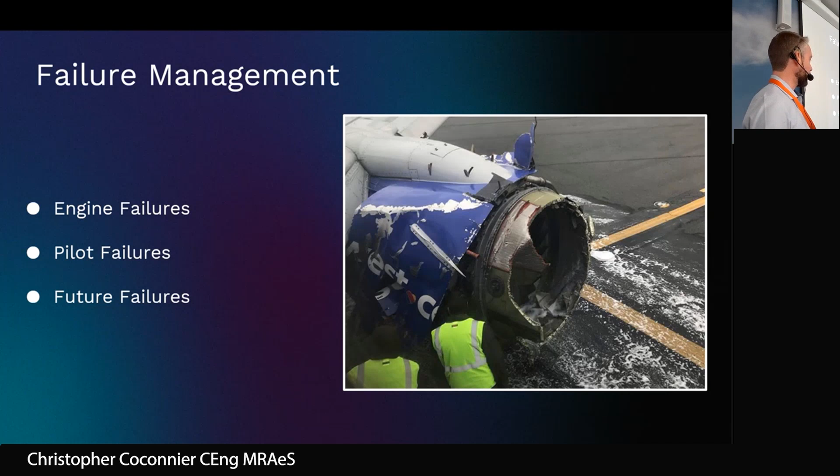So we're going to talk about failure, and of course, a lot of you here joining this presentation are Rolls-Royce engineers, so we're going to focus on engine failures. As Stuart mentioned, I wanted to add a part of this presentation talking about the human factors. It's a large part of aviation safety, and I wanted to bring it further so that we look at what the future brings in terms of aviation safety. There's a lot of discussion nowadays about what's coming next with automation, single pilot flight deck, and potentially autonomous aircraft.

So let's jump in first, talking about engine failures, and let's talk about the training involved. So EFATO is the name given for engine failure at takeoff. Why is this important? Originally, jet engines were, at the very beginning, quite unreliable, especially during takeoff phase when thrust would be engaged immediately, and failures used to happen statistically at higher rates during that critical phase of flight.

So engine failure at takeoff was then the most practiced engine failure recovery in pilot training. And it starts from the commercial pilot's license. So basically, when I did mine, this is the point where, as a pilot, it's your first time in a twin-engine aircraft, a twin propeller engine aircraft, and you spend most of your time with the instructor actually flying on only one engine. And why is that?

Basically, the instructor spends most of the flights shutting down one or the other engine to see how you react. And basically, the immediate reaction you're supposed to have is to compensate the yaw that you're getting from losing the engine and immediately step on the rudder pedal to compensate that yaw and apply opposite rudder. That has to be ingrained from the get-go when we're flying twin engine aircraft. That's why it's so important.

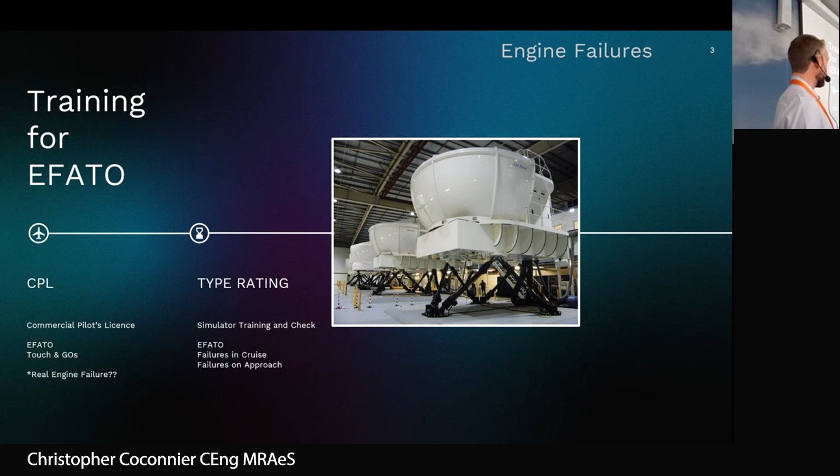We also look at failures in cruise, and failures on approach, and practice these in the simulator over and over until we pass the type rating check. The engine failure response is assessed during that check to get the type rating.

Further to that, then we're on the line, flying on the line, we have this recurrent training. It's twice a year. As an airline pilot, we get thrown back into the simulator, generally a 5-hour session, and we get thrown at us all manners of failures, including, of course, engine failure, which is integral to those checks.

We look at engine failure at takeoff, again, failures in cruise, failures on approach, and sometimes we exercise more tricky things like dual engine failure and other survival exercises where we'll have a combined type of failure. That's twice a year, and once a year that is also assessed so that we get to revalidate our license. Our license is only valid 1 year, and we have to get reassessed every year to keep our license.

Then, of course, there's flying every day with passengers, and engine failure again comes up. It comes up as we're setting up the aircraft, planning our flights in the flight deck, and we have the moments of briefing with the captain and the first officer, where we discuss rejected takeoff and engine failure at takeoff.

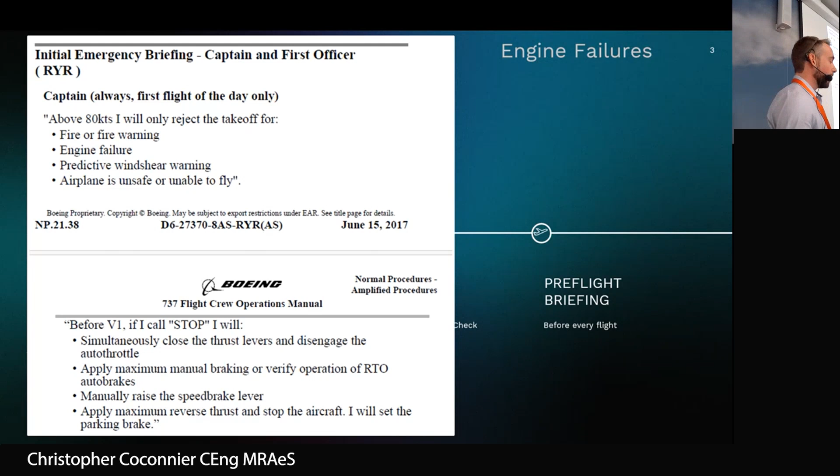That's also the reason you get, as a passenger, the cabin crew announcement safety demonstration, so that as a passenger, you get preloaded in your brain what you're supposed to do. That's why we even say to regular passengers, please listen, because it's important so that your brain is preloaded with the actions you'll have to take.

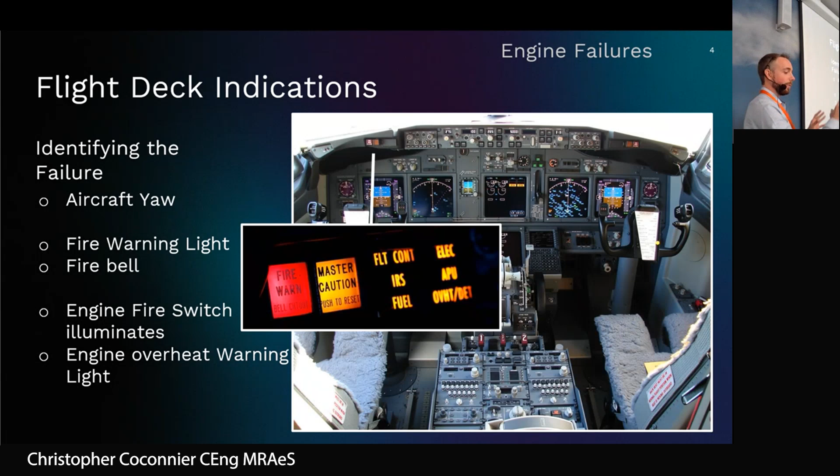On more modern aircraft designs, such as the Airbus and later 737, all failures are centralized on a central computer, which tells the pilot the failure and the steps to solve it. On the 737, we just get lights - in red, the fire warning and master caution light. In case of fire, the fire warning comes on, associated with a fire bell, and the response is clear. Master caution relates to other lights on the side - could be electrics, APU, fuel - giving pilots a general idea where to look on the overhead panel, which systems to check for lights. Each system on the 737 has an associated light bulb. When something goes wrong, that light bulb comes on and tells you that system has failed. So very unlike modern centralized computer designs, each system has an associated light telling us what has broken.

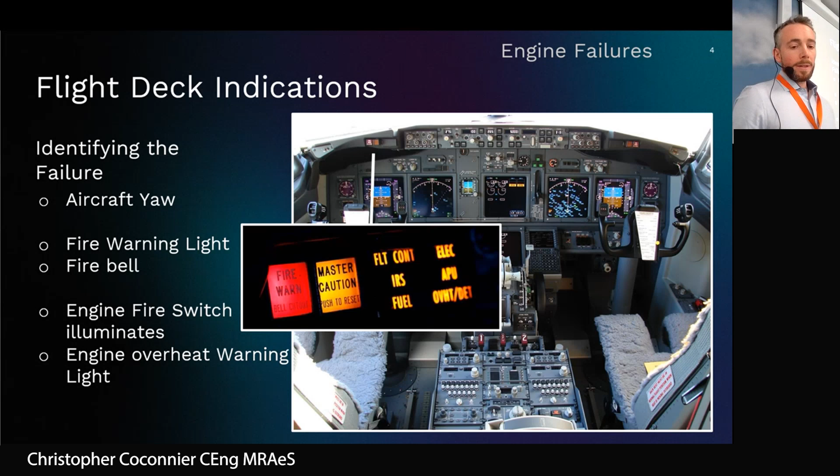Let's look at the pedestal. We have the thrust levers here, and the engine start levers below that, which ignite and input fuel into the combustor. And we have the fire switches - important in case the fire bell comes on, and our eyes immediately go down to check which engine is affected. Those switches - 1, APU, and 2 - relate to engine 1, the port engine, the APU, and number 2 engine, which is the starboard engine.

Those fire switches also have a light bulb, and they illuminate in case of fire, so we can't get it wrong - we select the one that's illuminated. We pull it, that shuts down the engine, and then we can rotate it, which sets off the extinguisher. On the 737, there are 2 extinguisher bottles, and for one engine you can use one or both extinguishers if needed.

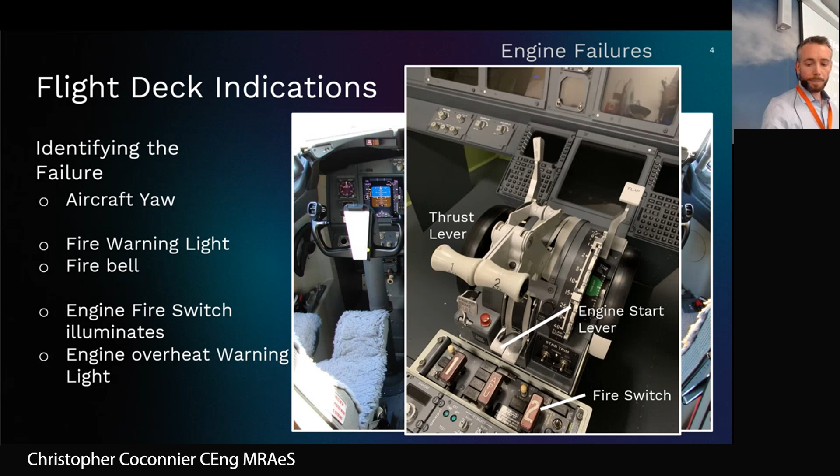So let's keep looking at flight deck indications. Fires are generally the easier ones to pick up. There are other failures, though, which are more common.

Question: Do we actually have feedback if the fire is extinguished? Yes - the lights will extinguish, and first we'll get feedback that the extinguisher bottle is discharged, and then the light will also extinguish for either overheat or the fire.

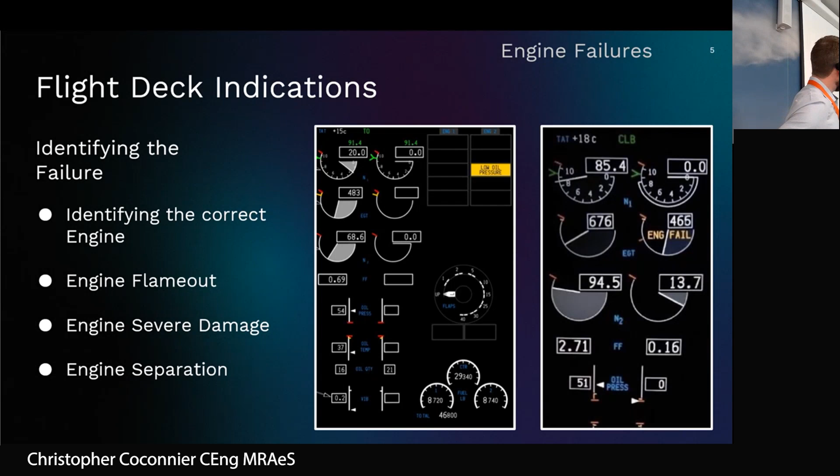So, yeah, I'm going to carry on talking about flight deck indications and this case study, which is quite interesting. This was British Midland Airways flight 092 in the 1980s, 1989, a brand new aircraft, a 737-400. It was the re-engined 737 with the brand new CFM 56 engines.

The aircraft was about 4 months old, and there was a fan blade flutter on the port engine that provoked an uncontained engine rotor failure on approach. The pilots misdiagnosed the failure and shut down the other engine. Now, there's a few reasons for that, and we'll look into it.

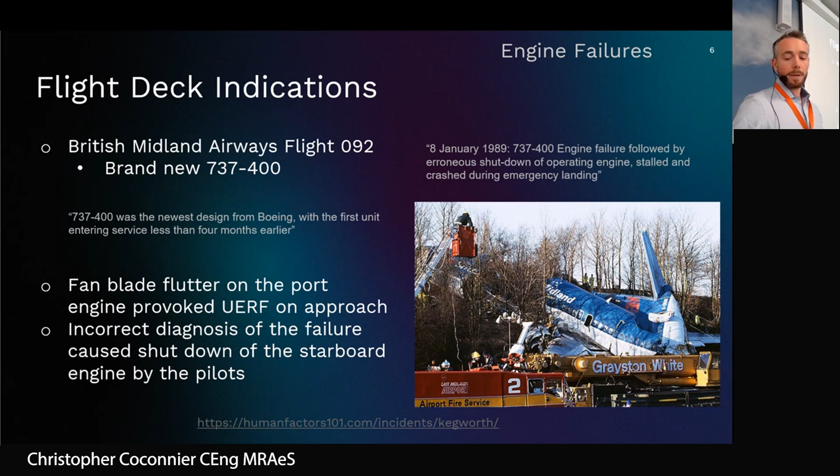One of the reasons was the updated engine indications panel, before the screen digital display I showed you earlier. Both pilots were very experienced on the 737, but not experienced on this new aircraft. This display was basically an update where they digitalized information. They used to be just gauges, with bright white needles you could quickly scan depending on the phase of flight to see everything was in the correct position. If something was going wrong, you'd see the needle fall. So these new displays were already a first source of confusion.

Now, there was something else. There was not only a new engine design, but also a new bleed air design. In that engine failure, they got smoke in the flight deck. As far as they knew, on the 737 until now, the bleed air into the flight deck came from the right engine. So when they had smoke in the flight deck, they immediately assumed the right engine had failed and shut it down. Except in this new design, the 737-400, the whole concept was changed for the bleed air, and it was the other way around—the bleed air came from the left engine. They hadn't received enough training or awareness from the company about this, so that knowledge was missing.

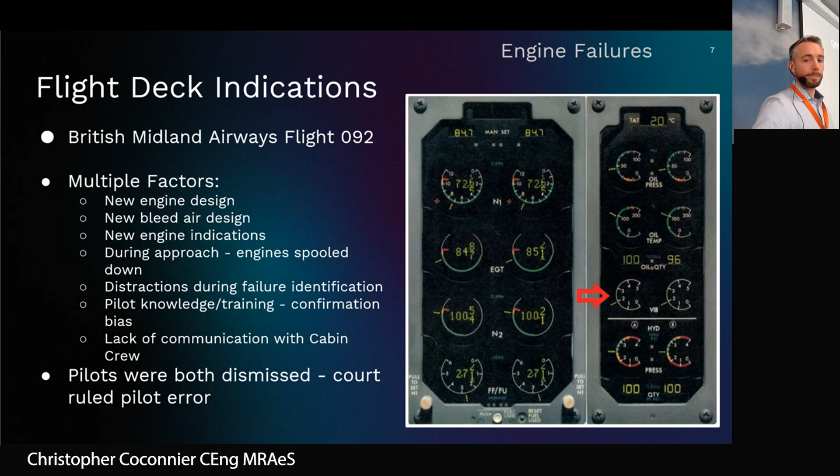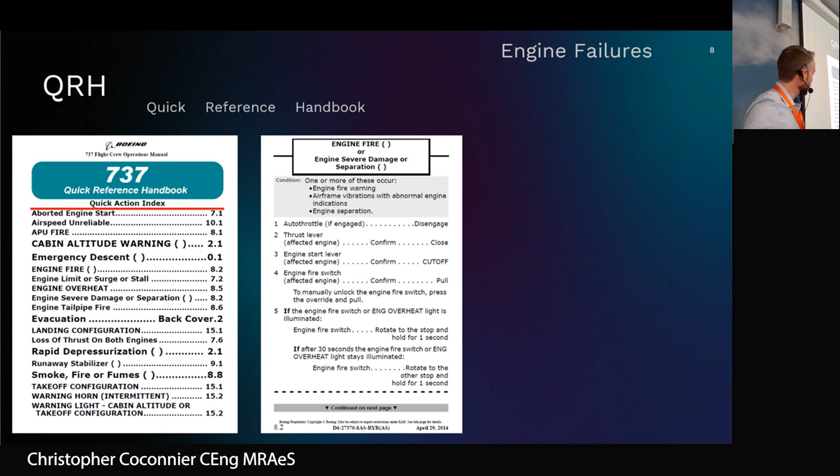So we'll come back now on the quick reference handbook, just to give a bit more detail. The QRH, as we call it, quick reference handbook, contains basically all the responses to any kind of system failure on the aircraft. That's the front cover here for you to see, and as you can see, a lot of the engine issues are on that front cover. Those are basically some of the main issues and the most immediate actions. There are many more checklists in the actual book.

Some of them you might notice are also written bigger, like the cabin altitude warning, or the evacuation, or the rapid depressurization. That's because Boeing estimated that in those conditions you'll have limited visibility. It's written bigger because, for example, in smoke, fire, fumes, or rapid depressurization, you suddenly get a lot of water vapor forming in the flight deck and in the cabin, so you want to be able to read that.

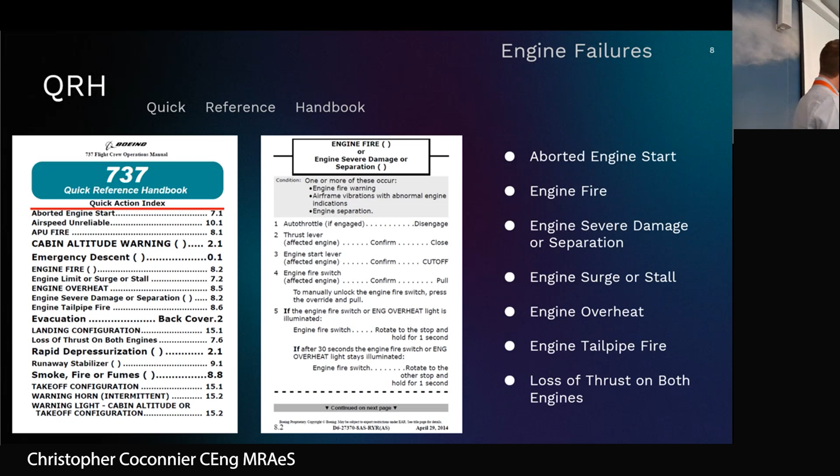So we've got here the engine fire, severe damage or separation checklist, same checklist, same response for both. And all those items, the first 5 items, are memory items. So those are items we're going to do as pilots from memory, and we're basically going to call out all those steps.

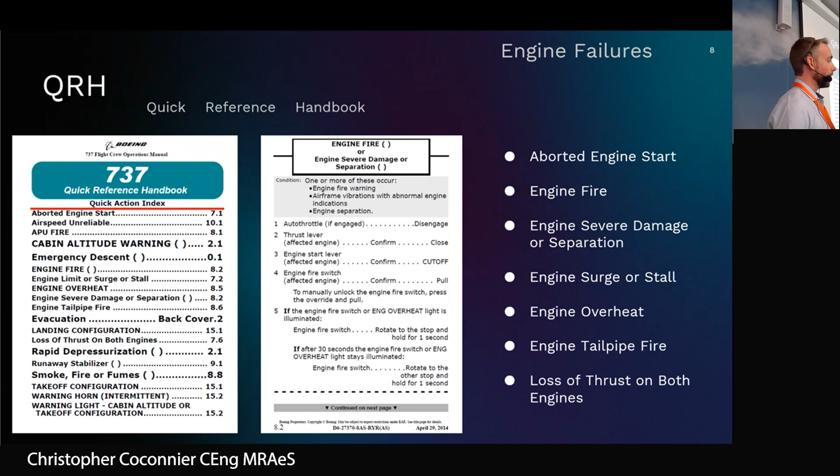Auto throttle if engaged, disengage, thrust lever engine number 1, confirm, close, engine start lever engine number 1, confirm, cut off, engine fire switch engine 1, confirm, pull. Then if the fire switch is illuminated, rotate stop, hold for 1 second, and that basically causes the extinguisher to activate.

So we have the list here of all the engine-related failures which have the checklist.

So we've got aborted engine start also in the QRH, which is a failure on the ground, in which case we abort the start. We've got engine fire, which we've mentioned, severe damage separation.

We've also got surge or stall, which has a slightly different response, which we have here. We have engine overheat, which is basically EGT going out of limits without actual fire, and engine tailpipe fire, which might occur on the ground, and then also the more unlikely case, loss of thrust on both engines.

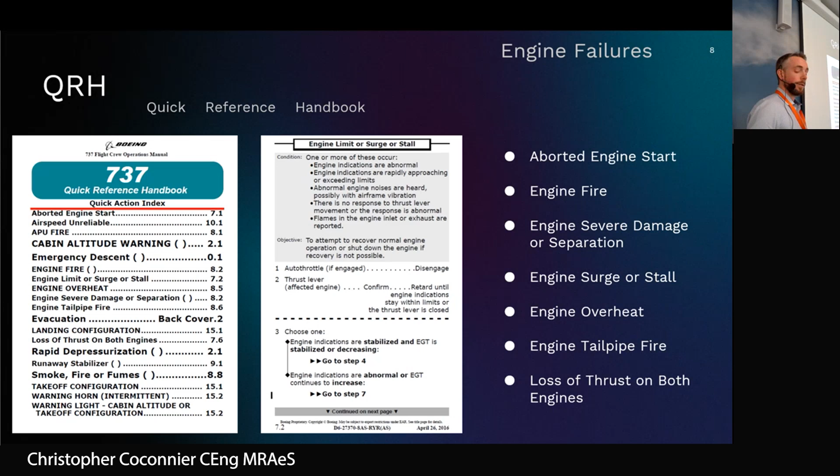And that, by the way, is the only time the checklist tells us by memory to attempt a relight, lost thrust on both engines. And in fact, we're going to later have a look at the relight.

And most of the time, the checklist basically prompts us if we need to relight. If the checklist doesn't prompt us to relight, we don't do it unless it's a double failure.

So now looking at engine failure at takeoff, I'll bring you through the whole sequence because the checklist is only a very small part of what we're doing.

It's generally statistically used to be the case that the worst case is when you'd have an engine failure at that point, you're going at high speed down the runway, you want to get off the runway, you want to avoid obstacles. So you want to be able to climb out. It's a critical phase of flight, and that's why we practice it.

So after that, we call positive rate. The pilot, in those situations, we always have one pilot flying and one pilot who's monitoring the instruments and doing the radios with air traffic control. During a normal day, we interchangeably swap those roles with the captain and the first officer, so one is always pilot flying, the other pilot monitoring.

So in this case, in my company, as pilot flying, we call positive rate, the captain will put the gear up. Of course, with the engine failure, I'll be looking outside, apply rudder to compensate, hold the rudder. Pilot monitoring will call air traffic control and call standby.

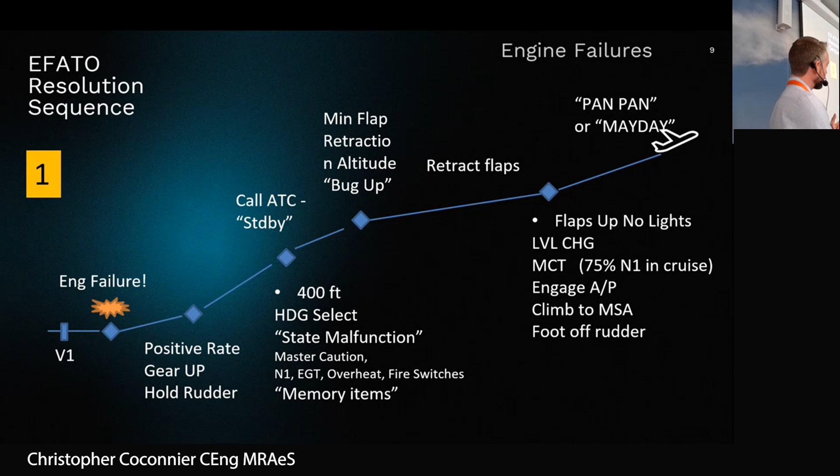So for comparison, I have a few colleagues who've flown the Airbus, and on the Airbus at 400 feet, they can just immediately call autopilot. That's it. During that whole phase, until 3,000 feet on a Boeing, we have to have our leg basically holding the rudder, and at that point you start getting a cramp.

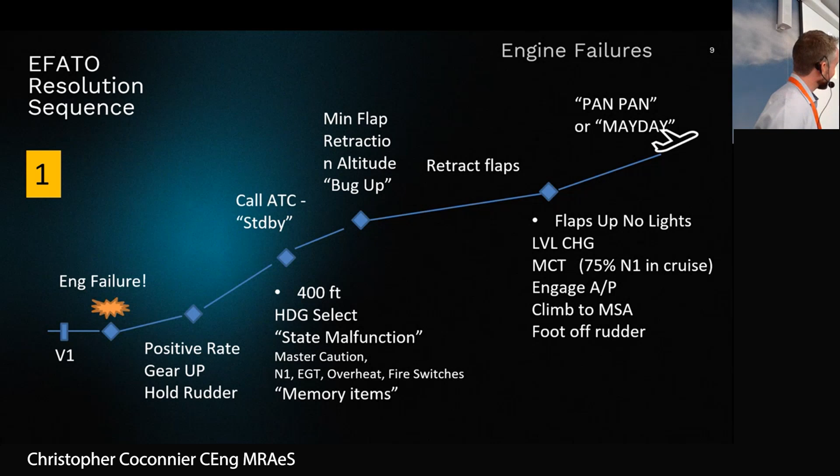So yeah, engage the autopilot. We climb to the minimum safe altitude, and at that point we can take the foot off the rudder.

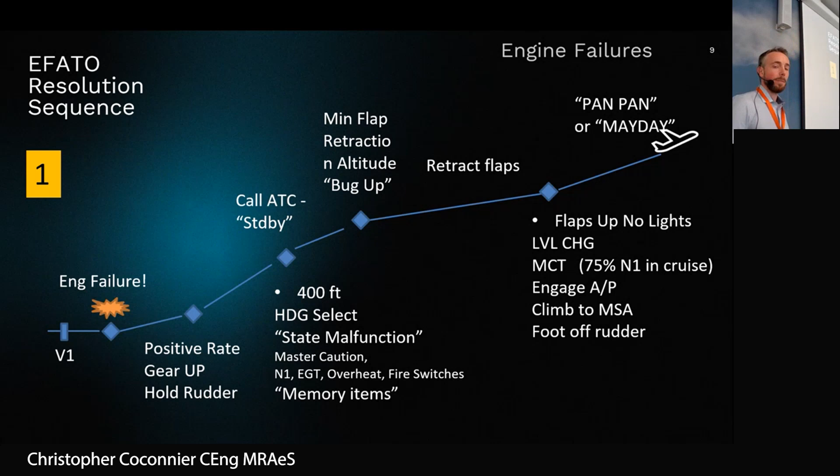At this point, the pilot monitoring can call ATC and call either a pan-pan call, and if it's more serious, in case of fire, you'd probably call a mayday call. So mayday, mayday, mayday, your call sign, and then the failure.

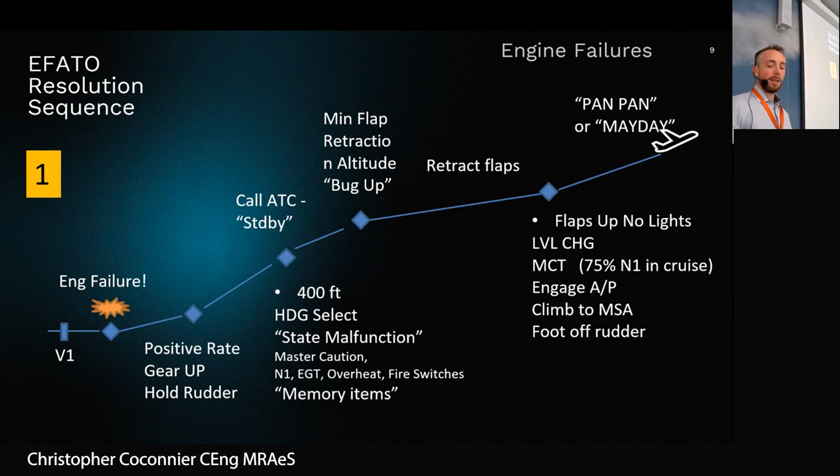That's not the end of it. So we call ATC, we request a hold, or we request vectors to stay in the vicinity of the airport we've just taken off from.

At that point, the aircraft is under control. We have time now to look into the quick reference handbook, so we open up the right page and we go through all the checks. We read them out loud and do all the actions that are required.

We come to a point when the checklist requires us to switch the APU on to get a backup power source. We switch it on. While that's happening, we get the weather from the departure airport to see if we can actually land there. Possibly we took off with fog, that sort of condition. We wouldn't be able to land in fog on one engine. We don't have category 3 landing capabilities on one engine because we don't have both autopilots in that situation.

Then select the autopilot opposite the failed engine, and at that point we can put the QRH on the glare shield and start planning to land at the nearest airport. At this point only, we do after takeoff checks, and then we discuss, captain and first officer, about what we're going to do.

Part of discussion is calling the cabin crew and asking for any useful information, anything they've seen out of the window, any noises they might have heard.

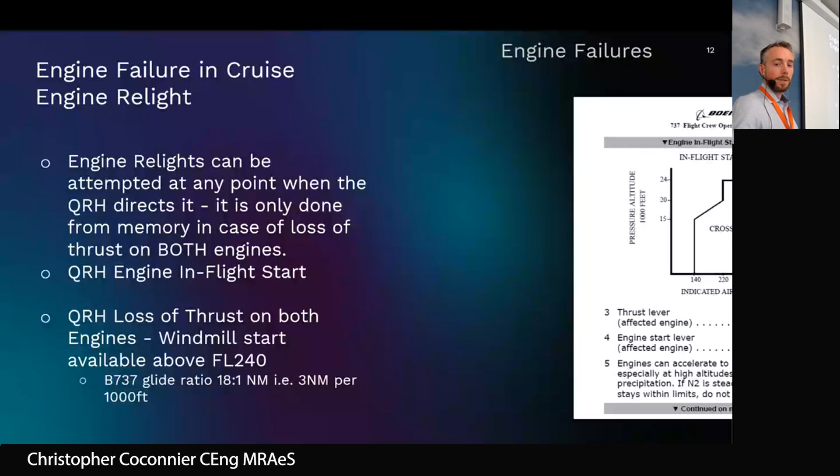Basically, a quick word now on engine failures in cruise and engine relights. This is more for the engineers here. Basically, how we determine we can relight.

The checklist tells us basically when we can relight, except in the case, as I said, of a double engine failure, where we just immediately try it on memory. It just involves shutting down the engine start lever and then opening it again.

In the case the checklist tells us to do it, let's say after takeoff we've got an engine flame out, we can attempt it, and you've got basically that flight envelope. So on the x-axis, you've got indicated airspeed, and on the y-axis, you've got the pressure altitude. Generally at low altitudes, you'll be going around 220, 250 knots.

So most of the time, you're in the area for the cross-bleed start. That means you're using the bleed air from the functioning engine to restart the failed engine. And if you're at higher altitudes, you can, as you descend, especially in the case of loss of both engines, reach much higher speeds. So above 300 knots generally, you can attempt a windmill start, just using the speed of the aircraft and the wind to attempt to restart.

That's it. And by the way, if we have a loss of thrust on both engines, what really interests us as pilots is knowing where we can land. One figure we generally have in mind is the glide ratio, and most airliners nowadays have very similar glide ratios, which is very good, I must say. It's about 3 nautical miles per 1,000 feet.

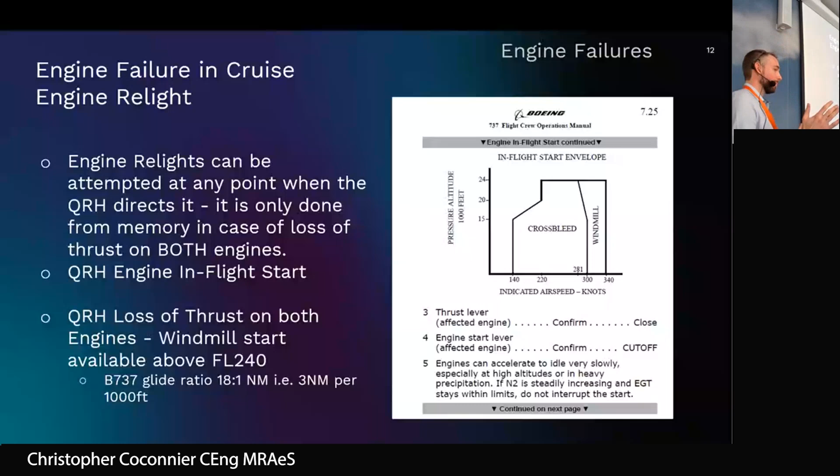So that's just an example of the loss of thrust on both engines checklist, and the memory items are the first 4 items of that checklist. Basically it's 2 attempts at relighting the engine.

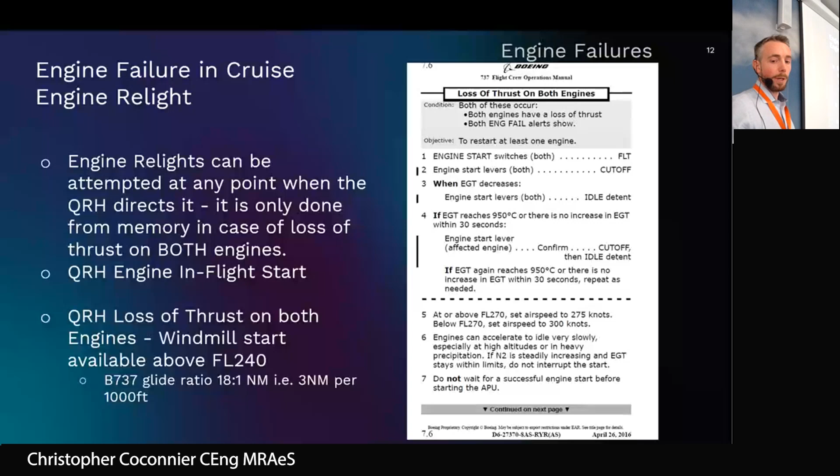And the whole checklist basically gives multiple attempts at relighting the engine. It also gives indications of the flight level and the speeds required, if you look at point number 5.

So we're now going to have a look at, yeah, please. Question: do you try to stay at altitude if you have those engines out, or do you want to dive down into the relight envelope?

Yeah, that's a good question, and I've discussed this with Manuele quite a bit, and we don't actually learn about that as pilots, about keeping an optimal glide slope.

We basically at that point, as the checklist points us towards, are getting the maximum speed possible so that we can attempt the windmill relight. That's it. But the optimum glide is not something we have in mind. We don't have the optimum rate of descent. We just have the idea that we can travel 3 miles per 1,000 feet, just for landing purposes.

So I'm going to show you now a video from our training department, which is basically a demonstration of the rejected takeoff, so you get an idea of what's happening in the flight deck and the pace of all the actions during an engine failure at takeoff. I'm going to start that here, and I'll let you watch this.

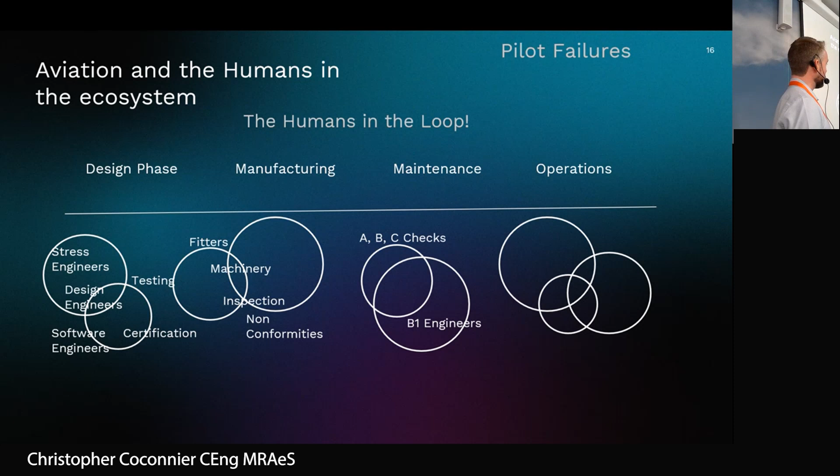Then we've got manufacturing. There it's quite usual: fitters, machinery, inspection, non-conformities. These things happen regularly. Further on towards operations, we get maintenance, A, B, and C checks. Not unusual in those conditions, they go stripping the aircraft, parts are missed, sometimes tools are left in the wing tanks. These things have happened. We then get our B1 engineers. After a long day flying, the B1 engineers come to check the aircraft every night, and tools might be left in the wheel well.

These things have happened. Then on the operations side, finally we've got the pilots, cabin crew, ground staff, passengers. Can't forget the passengers, also a very big human element on passenger flying. Sometimes they do things that are unpredictable, sometimes they fall ill. In the worst case, they try and do something deliberately to bring the aircraft down, which is rarer, thankfully. And then of course we've got the air traffic controllers who work hand in hand with the pilots. These two cannot be dissociated.

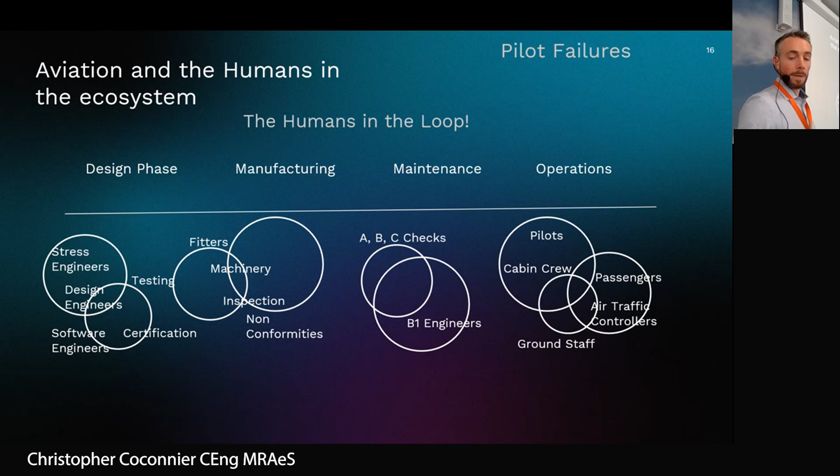Some of you might have seen this model called the Swiss cheese model. Every stage, every highly trained person here constitutes a barrier to any problem. And when a mistake is made, you basically get a hole in the cheese. Some days these holes unfortunately line up and you get a safety incident, or worse, an accident. It's never just one issue that causes an accident, it's a succession of problems - something went wrong with the design, something failed, it wasn't managed properly, etc. And then we have an accident.

In the industry today, some are saying, well, let's just take the human out of the equation, the pilots, and it will solve 80% of the accidents.

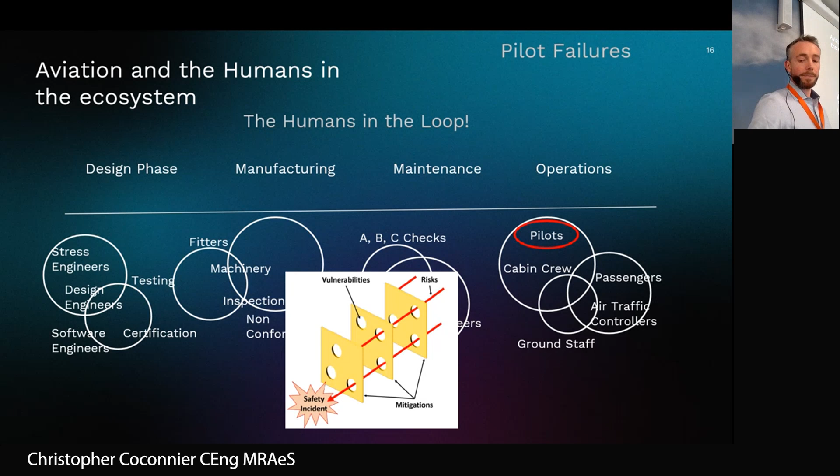Well, we can think about it. This is an example, Qantas Flight 32, where the pilots actually did a great job, so crew coordination was excellent. This was 4th November 2010, a Qantas flight flying from Singapore to Australia, and they suffered an uncontained failure in one of its four Rolls-Royce Trent 900 engines as they were climbing towards cruise. The crew coordination was great. They assessed the damage and went through it.

It was an Airbus, so they didn't have this book. They had all the failures centrally organized on the flight computer, the ECAM, and the good thing with that is it also prioritizes the response, especially important in this case where we had multiple failures. It wasn't just the engine, but the engine also split the front spar, so there was a fuel leak, hydraulic lines that were broken, extremely complex. It took them 50 minutes just to resolve all those issues on the ECAM.

Only after that could they try and see where they could land. They selected to go back to departure. The weather, thankfully, was good, and the performance was just good enough for them to land full of fuel, of course very heavy. They took a hold - this was the captain's initiative, not written in the books. They decided to take a hold next to the airport to allow them to burn more fuel and to try the flaps, to see how much flaps they could actually get. They also gravity-dropped the landing gear because obviously they were lacking hydraulics at that point. And they landed safely.

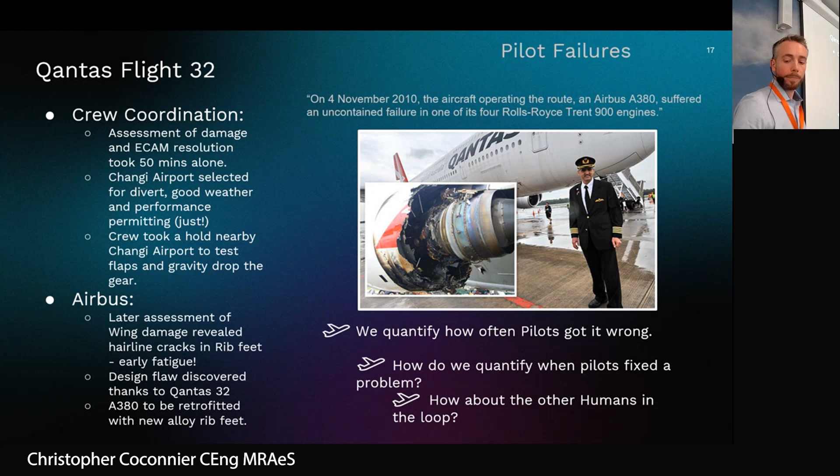So which future do we choose?

Talking about single pilot, autonomous flying, those less familiar with the industry immediately say, well, the technology is there, we can do it, there's no problem, the only thing stopping us is passenger acceptance. I would say those people are being disingenuous. They're basically trying to stop the real discussion about the real problems we're going to come into in a minute. Passenger acceptance, widely publicized as the only obstacle, we're going to see that it isn't.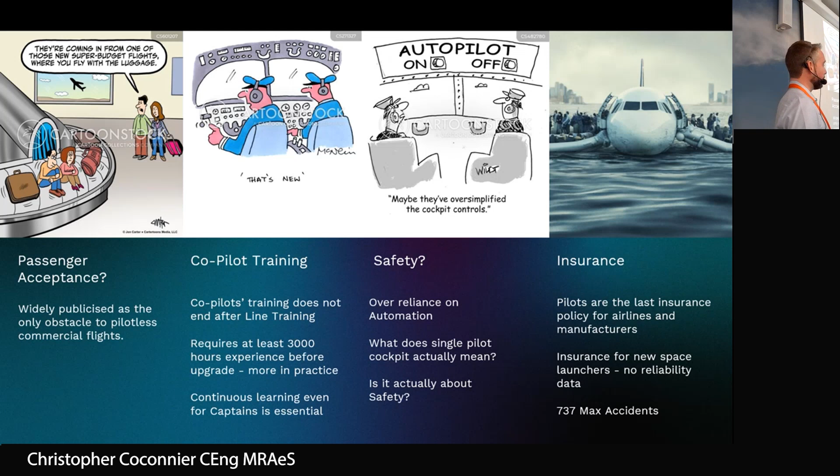And then there's the question of insurance. So we've seen previous examples where previously in history, it was very quick, very easy to just say, oh, we've got a crash, pilot error. Pilot error, sweep all the issues under the rug, and then the manufacturers will slowly fix the problem behind the headlines, behind closed doors. It's also a point Emanuele brought to me, saying that for space launches, insurance for new space launches is actually extremely expensive, because they don't have reliability data to basically assess how expensive it's going to be. So quite a problem for the new space launches. Could potentially be the same for aircraft insurance if we go that way.

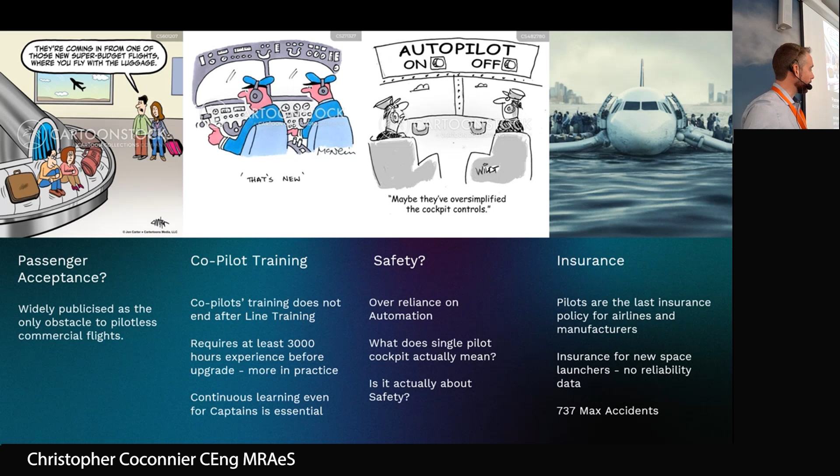And then finally, I'm going to touch briefly on the 737 MAX accidents because it's quite relevant, and we'll see why. There was a very good Royal Aeronautical Society lecture discussing this, just a couple of months ago. I really recommend you watch it. Pilots and an engineer discuss this topic really in depth. So I'm not going to go into depth, but just touch on it.

So just to remind you, there was a Lion Air flight on October 29th, 2018. First crash, first Boeing response was pilot error, Lion Air didn't do their job properly. Unfortunately, and sadly, about 6 months later with Ethiopian Airlines, the same crash occurred. So we have multiple factors: new engine design, new software, the MCAS, inadequate sensor redundancy, omitted pilot training, sensor failure, distractions during the failure, pilot response.

You see any pattern? Same thing as the British Midlands flight. Similar things, multiple new engine, new software, etc. Boeing eventually took the blame. Direct costs were estimated at $20 billion. Indirect costs nowadays are estimated up to $60 billion. Because of that, Boeing has now reduced their rate of building and delivery for the 737 to around 5 to 10 a month, when they were previously over 45, 50 a month before those accidents, because the FAA is right behind their backs, breathing down their necks, checking everything.